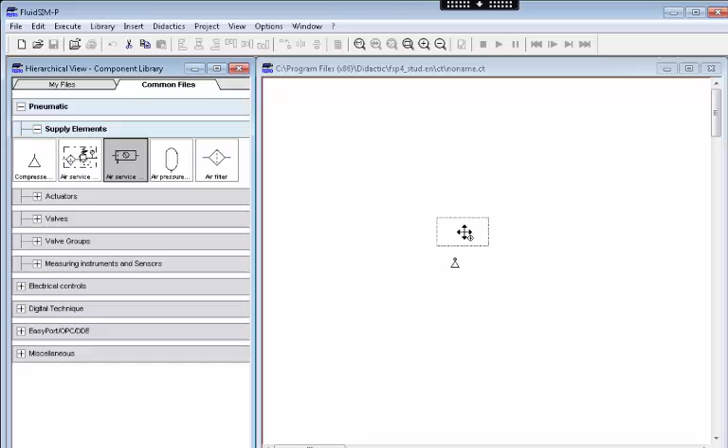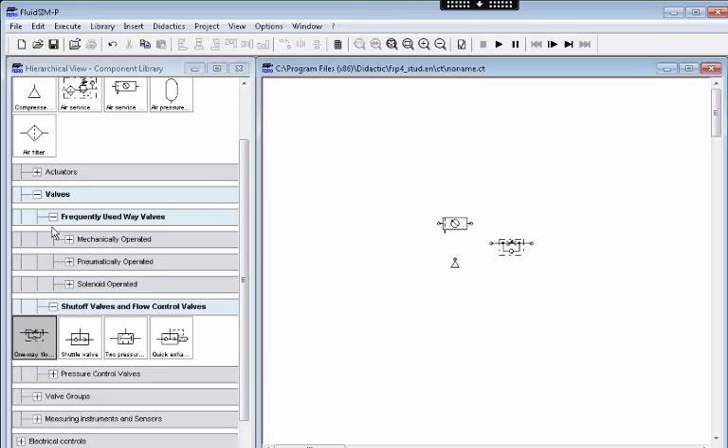You're going to go to valves, shut-off valves. You're going to drag a one-way flow control valve. You're going to go to valves, frequently used, solenoid operated, and grab your 5/2-way solenoid valve. And then go up to actuators, grab your double acting cylinder. And let's organize them, including flipping them.

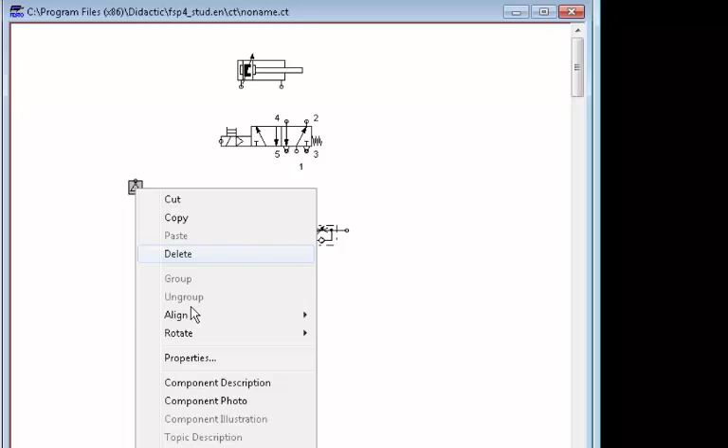First, our compressed air is going to go through our filter unit, and then through our flow control valve, from our flow control valve to our 5/2-way, and then our double acting cylinder.

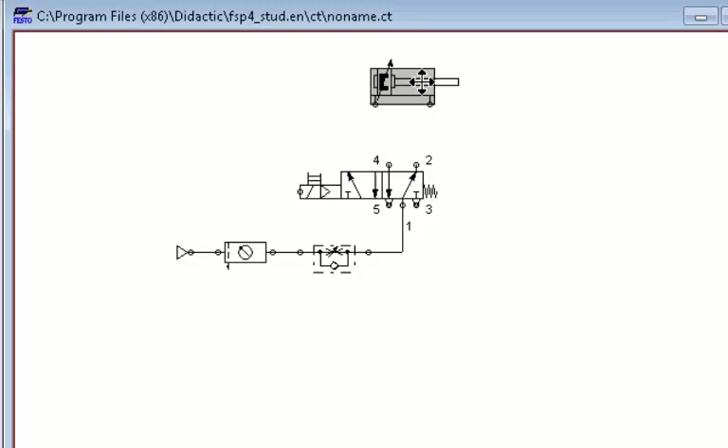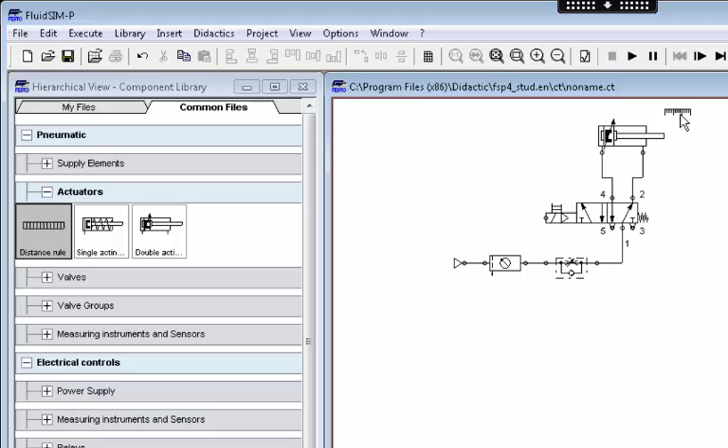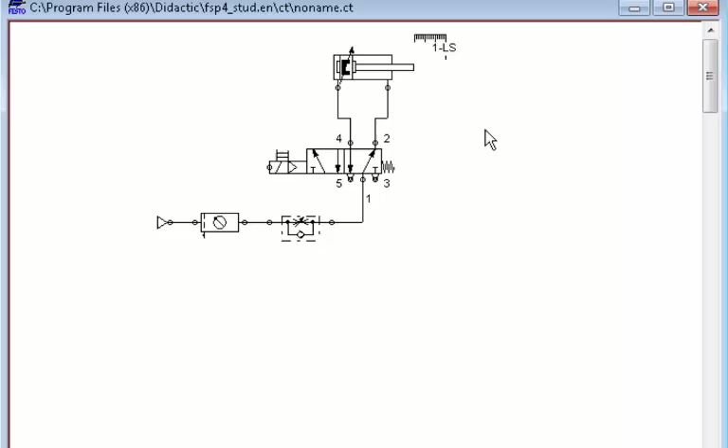Under actuators, you're going to grab and drop the distance rule. When you go near the front of this double acting cylinder and you release it, it'll automatically connect itself to the double acting cylinder. Double click on your distance rule, name it 1-LS, 100 begin, 100 end. Press OK. This is your complete pneumatic circuit.

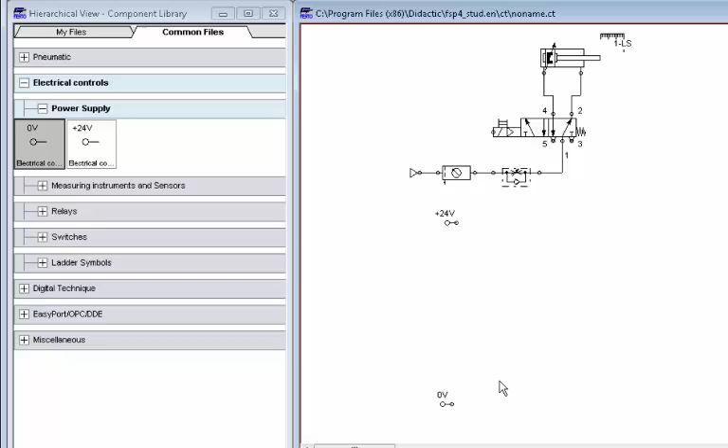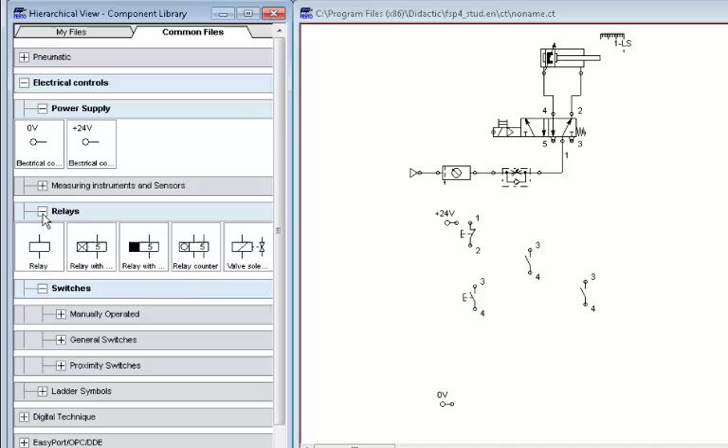Now we go to electrical controls. You're going to go under power supply. You're going to add a 24 volts as well as a 0 volts. You're going to go to switches, manually operated, push button make. This is going to be your start button. Push button break. This is going to be your stop button. You're going to go to general switches, make switch. These are going to be part of your relay. You're going to go to relays, grab one of them, and then one valve solenoid.

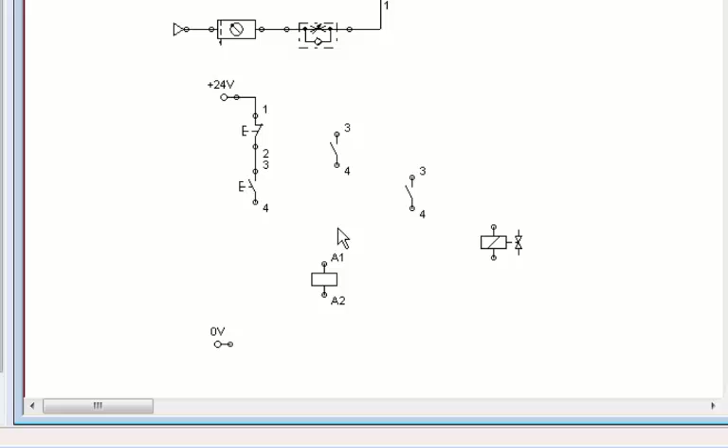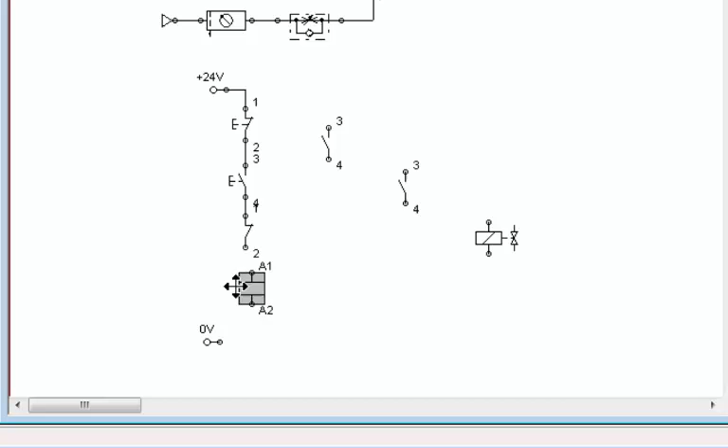Let's put them in order and connect them up. First, we're going 24 to the front side of the stop button. From the back side of the stop button or the break button, you're going to go to the start button, which is going to be your make push button. From there, we're going to go to our general switches, a break switch. I'm going to add that to the other side of our start button. From there, we go to our relay, and from our relay, we go to 0 volts.

One of these make switches is going to be used as a seal in for the start button. So go ahead and add it on both sides of the push button make. You should have a junction on each side of it. And then these last two are in their own rung, connected. You can add it to the elbow by just going to the corner. And this is the electrical circuit.

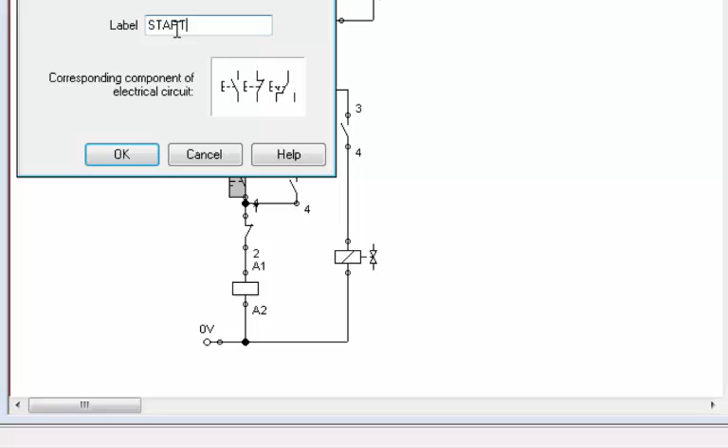Next, we need to name it. So go ahead and go to that first push button break. We're going to name it stop. Press OK. Push button make. Start. Switch. Break. Going to name it the same as our limit switch, 1 LS. You'll notice the switch now looks like your conventional limit switch in an electrical circuit.

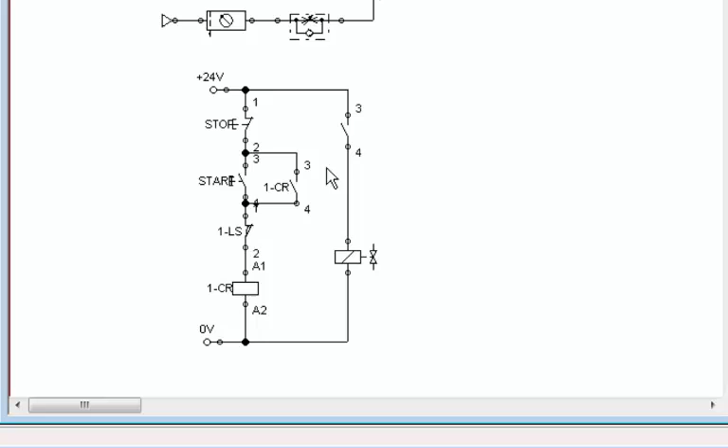We're going to name our relay 1 CR. And these two make switches are also going to be 1 CR. You can notice that they're normally open. And lastly, our solenoid, I'm going to name it SOL-A. Go ahead and move it so you can read. Left mouse button, drag. So you can read them.

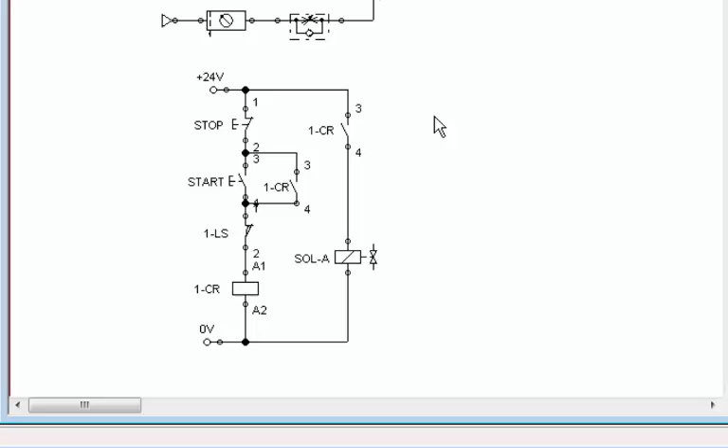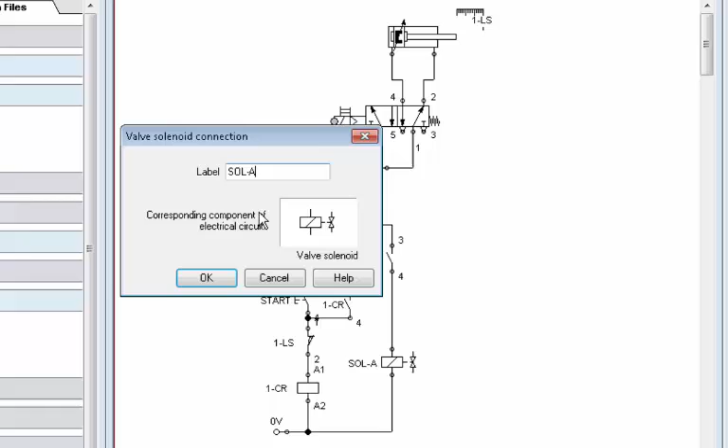So the last thing we have to do is to name our solenoid on our valve. At the end of your valve, go ahead and you'll see the green with the target. Double click. And you're going to name it the same as what you have on your electrical circuit. So now the two should be linked together. Go back to our previous sections where it teaches you how to simulate. Go to the top, press the play button.

Remember, you're going to have the light and the dark. The dark pneumatic lines are under pressure. The light pneumatic lines are without pressure, and your light red is your electrical line current flowing. So once I press my start button, remember your hand goes to a pointer. You can interact with it. Press your start button.

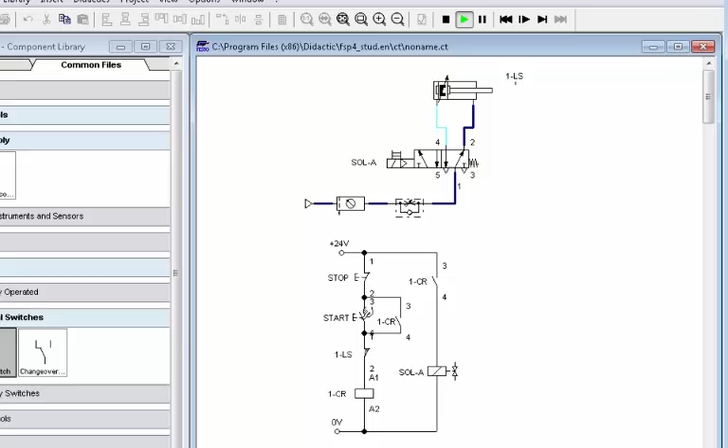It'll go all the way out to the limit switch. Once the limit switch is activated, it'll come back. You can see it right here in your electrical circuit, how that limit switch opens and the double acting cylinder returns to 0. Go ahead and press stop.